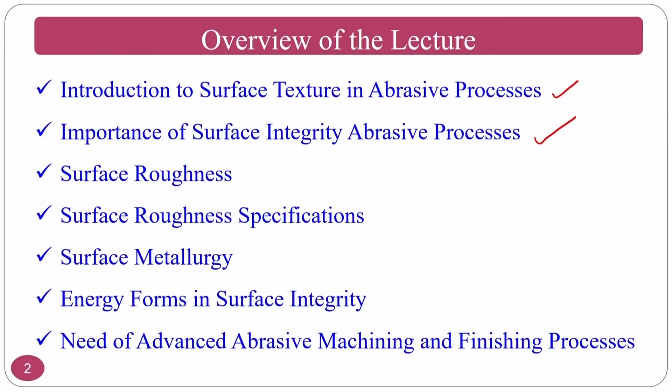Consider the grinding process, a conventional abrasive finishing or machining process. It not only generates surface roughness but also a lot of heat, because of which it can vary the surface roughness and surface metallurgy.

Because of high temperature, the surface may burn and degrade. Suppose the parent material grain structure is of a certain size; the grain size may alter because of the temperature generated during the process. That is why cutting fluids and other fluids are used in grinding. If you don't use them, there are lot of problems; if you do use them, there are other problems, as seen in previous classes.

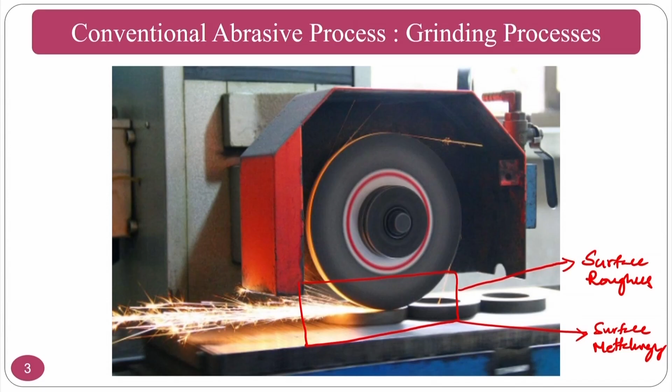Now I am going to teach you about surface roughness aspects as well as surface metallurgical aspects. Most often, as a mechanical engineer, you deal with surface roughness, and how its representation is done, which you will see in this class.

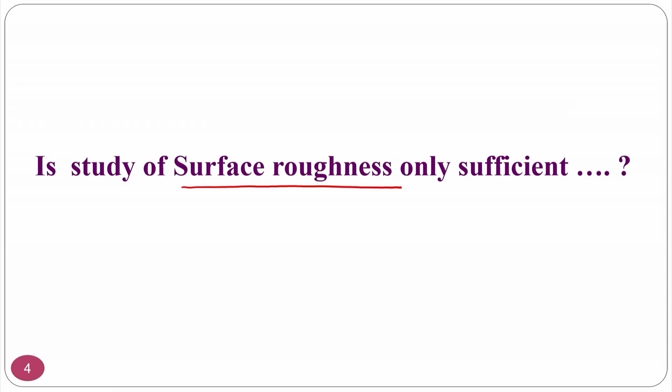Is surface roughness alone sufficient? If you recall the previous slide where the surface grinder is grinding and a lot of spark is generated, for that purpose you always look at surface integrity, which is nothing but surface roughness plus surface metallurgy. These are the two things one has to take care of.

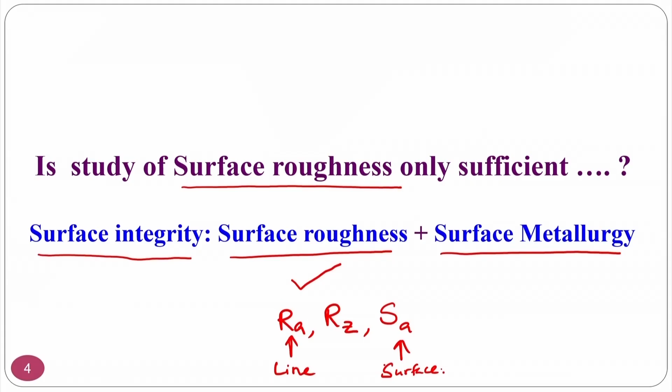As a mechanical engineer, we deal mostly with surface roughness parameters like RA, the average surface roughness value, RZ, the maximum peak to minimum value, and SA, the surface roughness value for a surface. RA tells about a line, whereas SA tells about a surface - SA deals with the average roughness over a particular surface, while RA deals with the value along a particular line. That is the difference between these.

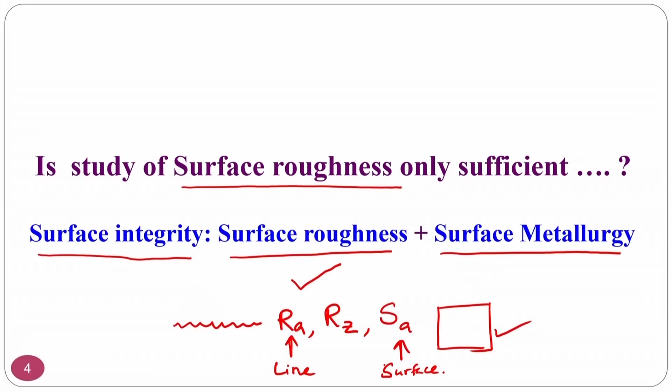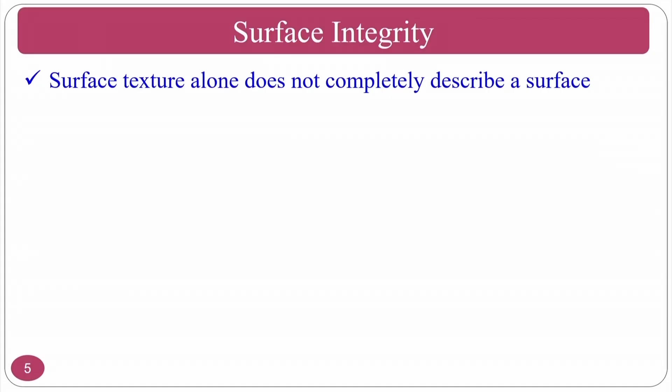Surface texture alone does not completely describe the surface, because the surface will have roughness, chips which are nothing but burrs, burnt surface, and many other things, since a mechanical system involves a lot of kinetic and mechanical energy. There may be metallurgical changes in the altered layer beneath the surface that can significantly affect mechanical properties. Assume the surface roughness is very smooth, but if the surface is burnt, once you put this component into practical application, metallurgical changes happen and lead to failure of the component. Even though surface roughness is very good, the component fails because of crack formation and other changes during practical application.

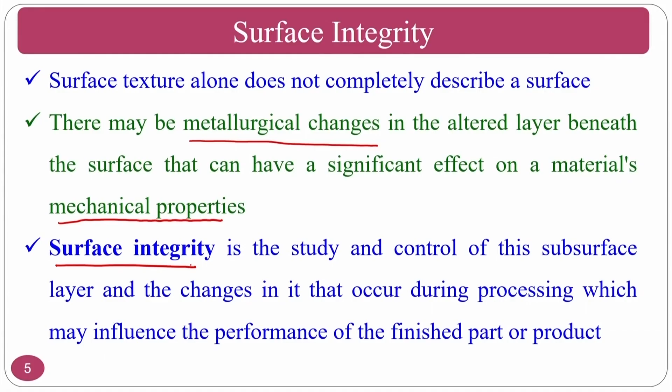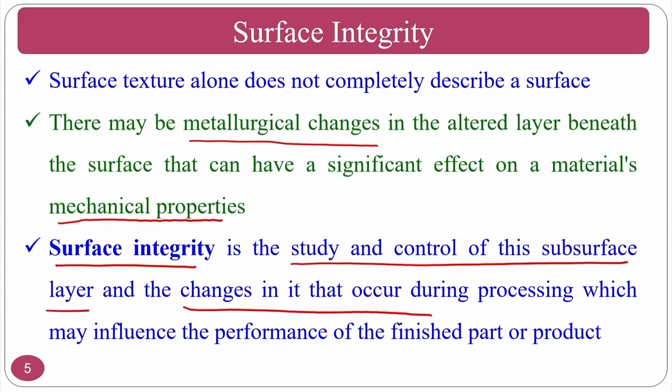This is why surface integrity came into picture. It is the study and control of this subsurface layer and the changes that occur during processing, which may influence the performance of the finished product. Surface roughness alone does not cover the complete picture; it also has metallurgical aspects, such as how the grain structure varies or whether there is any burning of the surface. So surface integrity has to be taken care of - not only surface roughness but also the metallurgical aspects.

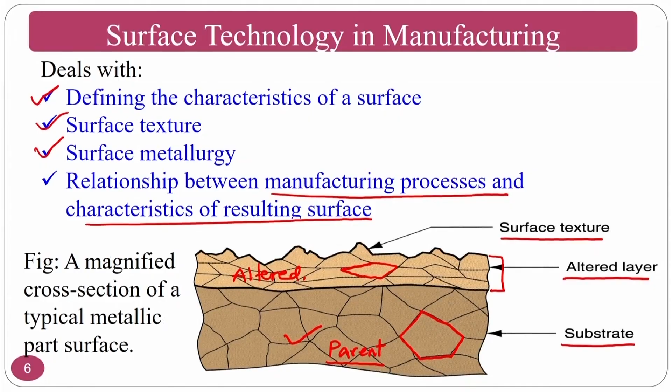Whenever I want to put a particular component, purely as a customer, I want parent material to be involved with respect to the interacting surfaces. But because of the manufacturing processes involved, you may alter the process, may alter the surface. That is why we have to take care about the surface roughness as well as surface metallurgy, and this altered surface will have a different morphology, different metallurgy, and the surface roughness also.

That is why the importance of surface integrity in abrasive processes, which we are going to study, is because of the altered layer and at the same time the surface roughness also.

Surface integrity in the grinding process - if you see burnt surface and unburnt surface, if you want to see the same surface, if you are giving good input conditions, you are going to end up with an unburnt surface, otherwise you are going to end up with a burnt surface.

If you see this one, the surface is burnt because of unfavorable conditions or unfavorable input conditions - this burnt surface is because of unfavorable input conditions that the operator has given during the grinding process.

Unfavorable input conditions lead to this particular burnt surface. If proper cutting fluid is given, low feed, low depth of cut and other proper conditions are given, then the surface is unburnt. That is why this surface is good from the practical point of view - this surface is good, but this surface is not good.

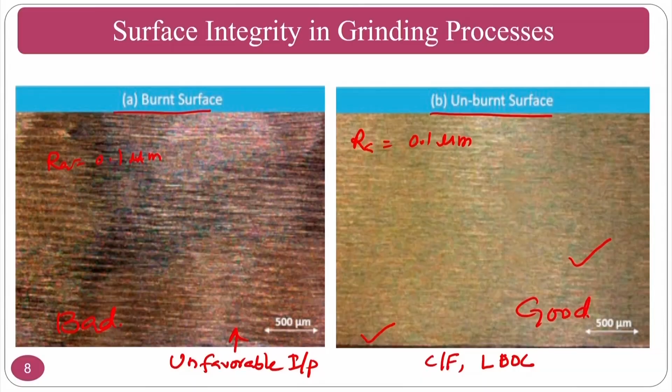Even though the surface roughness may be the same - assume that your RA value here is 0.1 micrometer, and here also RA is 0.1 micrometer - if you put both surface components practically, assume I have two components wherein one surface is burnt and the other unburnt, what will happen? Unburnt will give more life, but burnt will give less life because of its metallurgical changes. That is why you have to see the metallurgical aspect, not only the morphological aspect.

That's what I want to convey for those who work on surface roughness in grinding or advanced machining and other processes, because students will always report about the RA value - they will say we have achieved 0.1 micron or 0.01 micron and so on, but sometimes the paper lacks this. In a research paper it may alter the surface metallurgical aspects. So people should always mention the roughness value, as well as, if facilities are available, give the elemental analysis and surface morphological analysis using SEM and EDAX or EDS analysis. Using elemental analysis also you have to give this. Keep this in mind whenever you report a research paper.

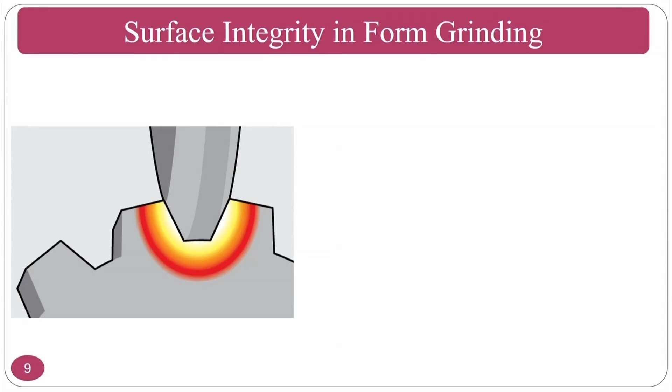The surface integrity in form grinding - assume we are doing gear cutting and other things - what happens here is, if you see the surface, normally this is the parent surface, and this is the metallurgically changed surface, the modified surface.

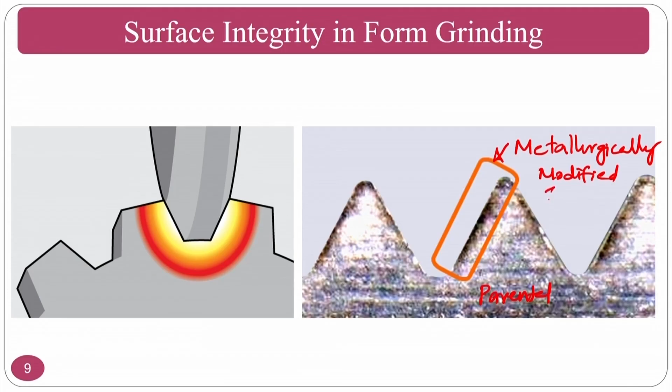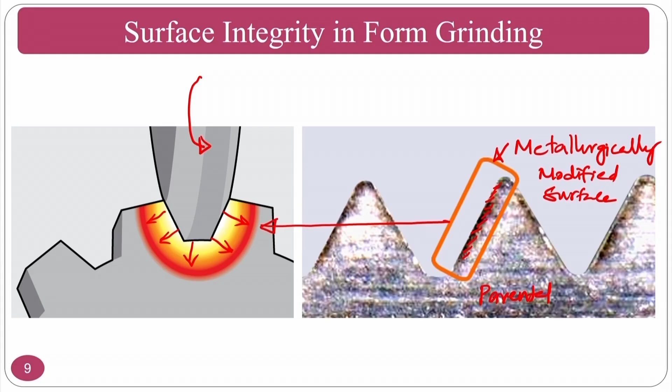Whenever you put this particular component in practical usage, what will happen? This particular surface will damage because the microstructure is different and the morphology is different. This surface may damage as early as possible because of crack formation and other issues. This layer is formed because of the temperature generated during this process - whenever you are giving this motion, temperature is generated. Because of the temperature generation, the microstructure changes, and if the microstructure changes, metallurgical changes occur to this component, and because of this it may fail during practical application.

You can also see the surface integrity in terms of other manufacturing processes. This is the parent material, the parent elemental structure, and you can see here clearly because of the heat and other effects, this is metallurgically changed.

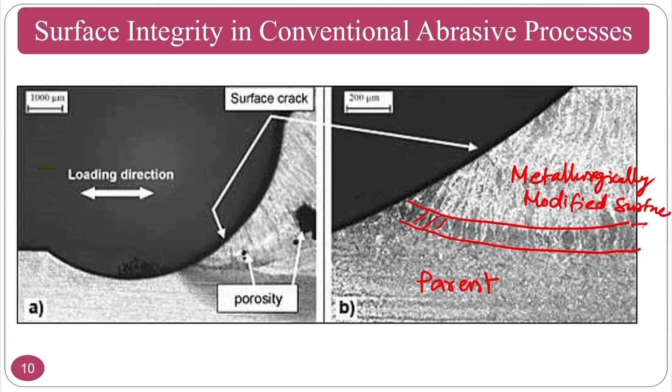Modified surface, metallurgically modified surface, is the surface wherein there is a gradual change between a metallurgically modified layer and the parent material. Sometimes people call it a conversion layer, because the microstructure in a metallurgically modified surface gradually changes to that of the parent material, and this gradual conversion is called a conversion layer in some textbooks.

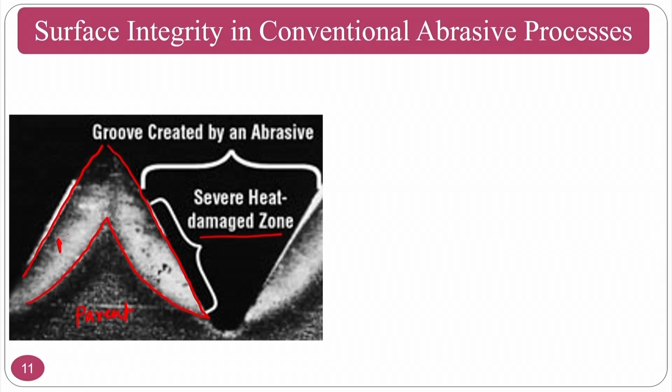You can see the groove created by an abrasive. Because of this, as seen in previous slides, structures like gear structures are formed. Severe heat damaged zone is there, and you can see the metallurgically changed layer here. This is the parent material, and this is a metallurgically modified layer. This is how the metallurgical layer forms because of heat generation.

This layer not only loses its mechanical strength because of the metallurgical change, but also can create cracks. You can see a lot of cracks generated on the surface, and whenever you put this component into practical application, what happens? This fractured surface will be brittle enough that brittle fracture takes place, and failure of the component occurs. That's why you should be very careful about surface integrity, not only roughness.

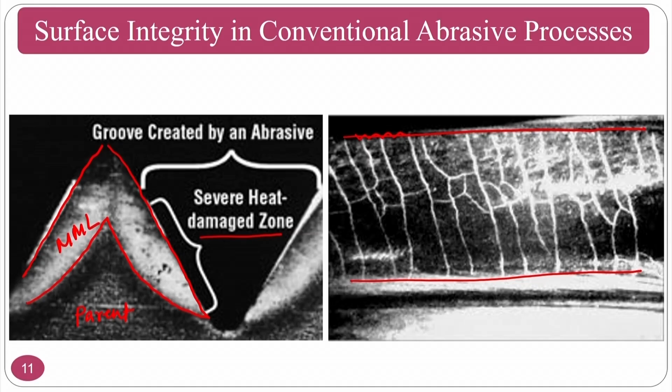If you see the roughness, this is a perfectly flat surface, you may not get a very bad surface. Here the surface roughness is very good, but you have to think about the surface metallurgical aspects. That's why mechanical engineers should also look into the metallurgical aspects and crack formation. Is there any microstructural change? Is there any elemental change? One has to check like that. Then only people get good publications in reputed journals.

As mechanical engineers, what we normally deal with is surface roughness aspects. So till now we have seen some of the importance of surface integrity and other things. Now we move on to our bread and butter, that is surface roughness and how it will be measured and represented, which we will see in this particular section.

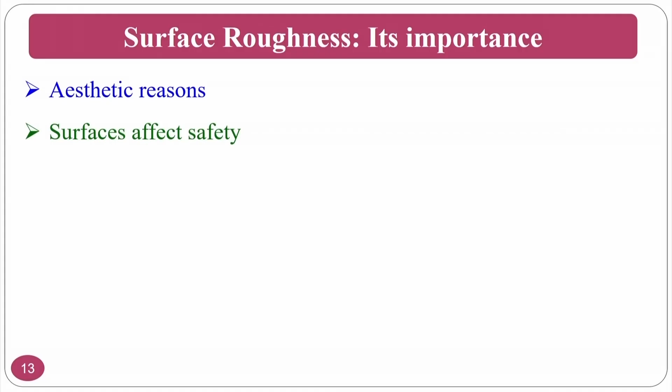Surface roughness importance: basically it gives aesthetic appeal, a very beautiful look, a shining or mirror surface. The surface also affects safety. Normally if the surface roughness is very smooth, it will be very easy to handle and it may not hurt the fingers or other parts where the operator is interacting with or handling that component.

Friction and wear depend on the surface characteristics. If the surface roughness is very high, the friction, wear and other things will be very high, so the friction losses will be very high. That means if you have a nano surface roughness, you will get low wear as well as low friction.

The surface affects mechanical and physical properties. Whenever you put a component into a particular application, the mechanical or physical performance will be better if the surface roughness is very good. Assembly of parts is also affected by the surface, meaning that if the surface finish is good and surface roughness values are low, the assembly of components will be very easy.

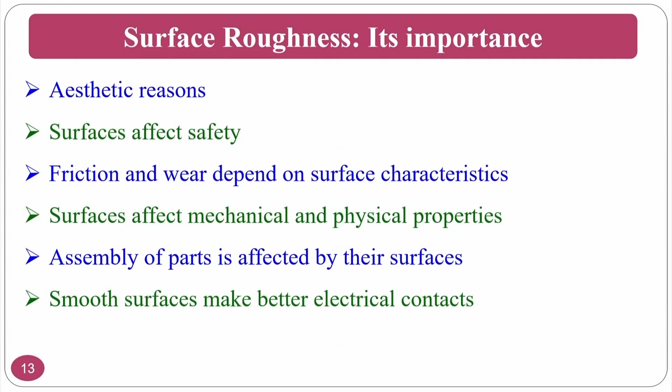Smooth surfaces make better electrical contacts. Whenever electrical contacts are improper, sparking will take place and there may be a loss in electrical connections. If you have a very good, low surface roughness, your electrical contacts will be better and proper connection will happen.

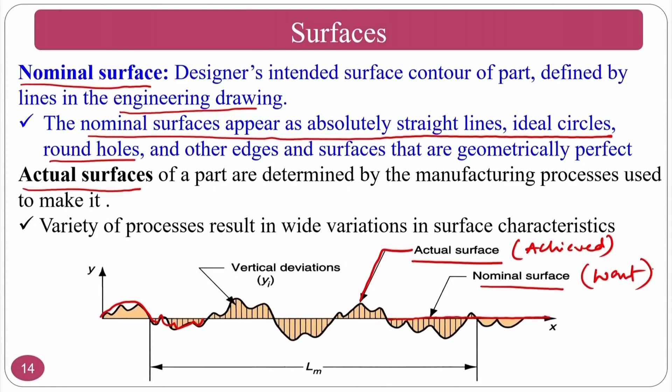So, the surface roughness in manufacturing processes. What I am going to deal with here is the surface integrity, which you have seen, the surface introduction and other things. The surface roughness measurement parameters, the surface roughness in various grinding processes, and surface roughness and surface morphology measurements, how you do them, and other things we will see in this particular surface roughness section.

Okay, the surface roughness section is one of the most important sections as far as abrasive processes are concerned, because abrasive processes are random processes: the abrasive size is random, the shape is random and the cutting edges are random. Sometimes, due to the sieving, your size may have slight variation. Assume the mesh size is 220, you may get plus or minus 2 or approximately 3, but the cutting edges and shapes are random. That is why the surface roughness you achieve is random.

If you use proper lubrication and cutting fluids, you will get a very good surface. But the surface roughness you want and what you achieve is slightly different. For that purpose, you have to go through this section, which is most important from the point of surface roughness in abrasive processes.

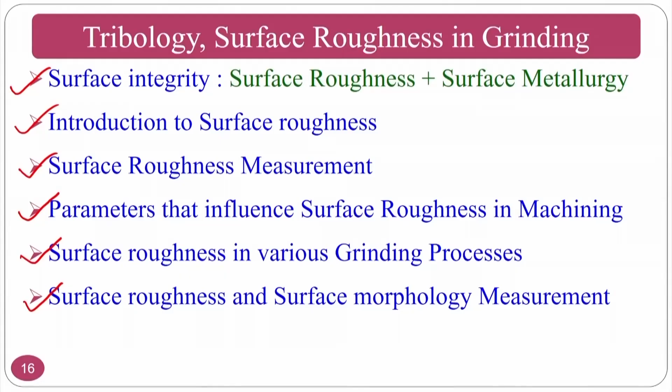Okay. If you see this particular surface, the surface will have 3 things. This is the surface. The surface will have a profile. This is called a profile, and PRA represents profile roughness. This is called waviness, and this is called roughness. Waviness profile and roughness profile. If you club the roughness profile and waviness profile, you are going to get the profile roughness.

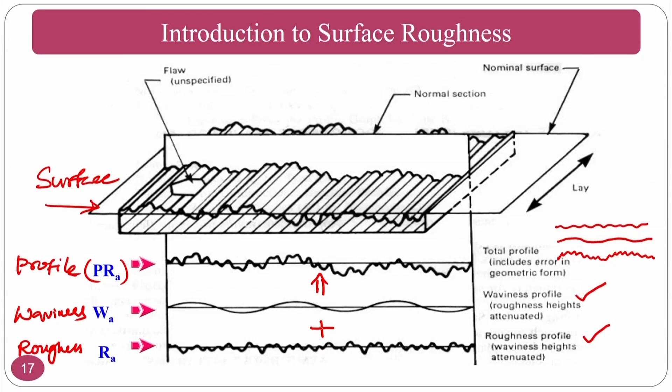Hope you got it. This is my surface roughness and this is my waviness. If you club these two, what I get is profile roughness. So, originally what you see is profile roughness, whereas the rough surface is what we want. That means we always deal with this particular surface. Waviness is also important, so that you can divide the roughness and waviness. Whenever you want to measure profile roughness and waviness, you have options in the surface profilometers. You just choose those sections and it will give all the values.

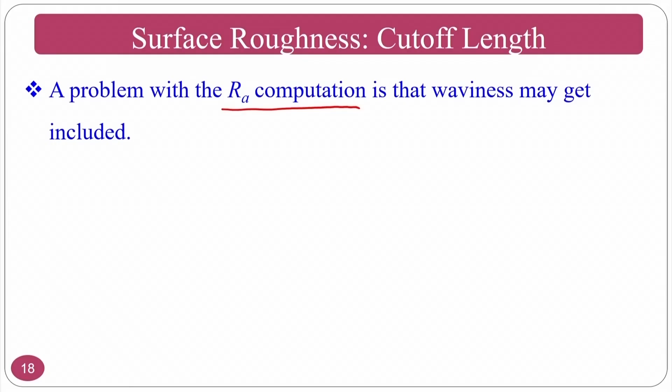Cutoff length is one of the most important things, because what we are measuring is roughness. If you do not choose the cutoff length properly, your surface roughness values may vary slightly. Why will it vary? It depends on the cutoff length, as we will see in this slide. A problem with Ra computation is that waviness may get included. As a manufacturing engineer, assume your requirement is to know only the surface roughness value, not the waviness. In that circumstance, if you do not choose the cutoff value properly, it may include the waviness also.

To deal with this problem, a parameter called cutoff length is used to filter and separate waviness from the roughness deviation. There is one particular thing you have to give, that is nothing but the cutoff length. You have to give a cutoff length whenever you measure. Cutoff length is nothing but the sampling distance along the surface, and the sampling distance is shorter than the waviness. That means you have to give the cutoff length, most of the time, less than the waviness of that surface.

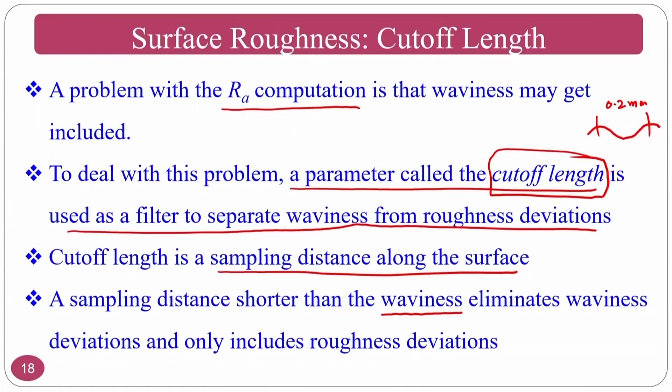So, if you give a cutoff length as small as possible, it will eliminate the waviness. If you intend to take waviness, you can give a big cutoff length; otherwise you have to give a very small cutoff length so that it eliminates the waviness. Assume my waviness distance is like 0.2 mm. If you want to remove this, just give the cutoff length less than 0.2 mm, so the waviness will not be included in the roughness. That is what some textbooks explain.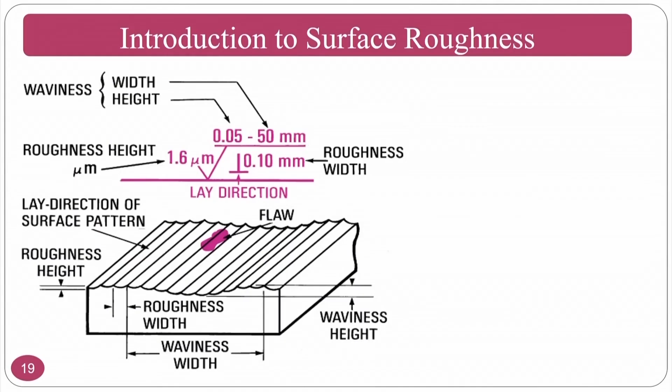If you see the surface, you have seen a similar picture in the previous slide. This is the surface where I am going to deal with the lay. Lay is nothing but the direction of the surface pattern. Here the surface is generated by the grinding process. Assume the grinding wheel is rotated like this, the surface pattern is generated. The lay is the predominant direction of the surface roughness, how it is formed, and you have to measure the surface roughness in the direction perpendicular to the formed surface pattern.

That means that this is the direction of your surface roughness measurement, so that you will get a good value of surface roughness, or the original value of surface roughness. Sometimes some people will measure the roughness in this direction also. Some people claim that this is also good, but practically what I feel is that you have to measure like this, perpendicular to the lay direction, then you will get the original surface.

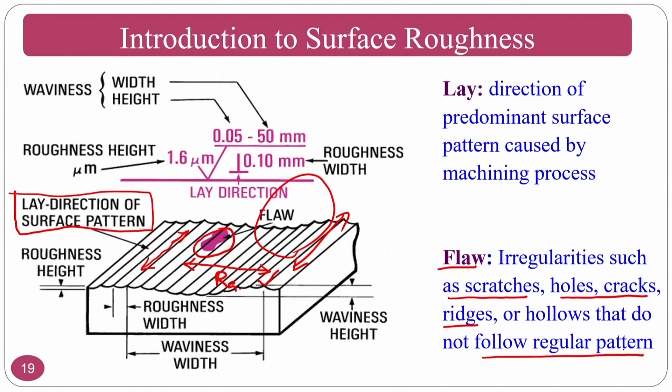The flaw is nothing but this one, whatever is there. It's the irregularities such as scratches, holes, cracks, ridges and hollows from the regular pattern. That means these are some of the problems because of the grinding process, problems because of material defects during the material processing itself. Assume that I am purchasing a block from some company. If there is a material defect, these types of flaws will come.

Assume that there is an inclusion, so it will stay there. So that is a flaw. If there is a hole, which is a blowhole during the casting process, that is a flaw. If you are grinding, then a deep hole will come, and other things. So what are the other things that we have to see? The four elements. One we have seen already.

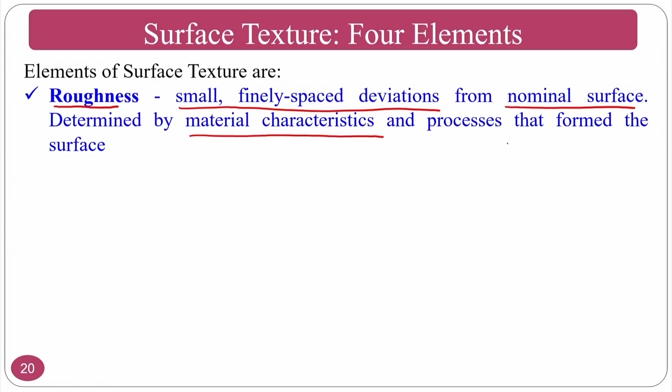So roughness is nothing but the small, finely spaced deviation from the nominal surface. This is a small, finely spaced deviation from the nominal surface determined by the material characteristics and the process that formed the surface. Waviness, as we have seen, is a deviation with larger spacing. This is the surface roughness and this is the waviness. So you can clearly see that this is a small and finely spaced deviation, but the much larger spacing is nothing but waviness.

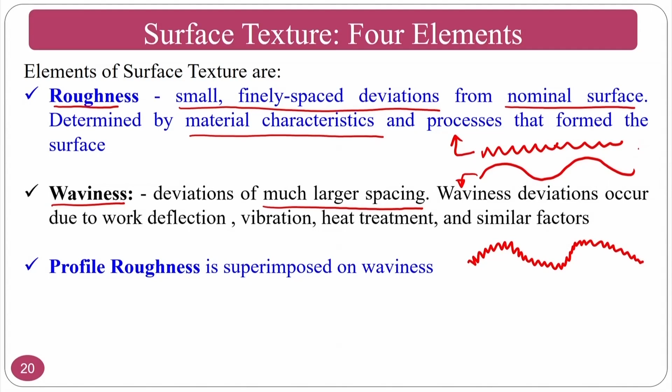And the profile roughness: if you superimpose surface roughness as well as the waviness, you are going to get a profile roughness. I am just superimposing the roughness as well as the waviness. These two, 1 and 2, if I am clubbing them, then I am getting 3, that is nothing but profile roughness. The flaws we have seen are the ridges or holes that are formed. In the previous slide also we have seen them.

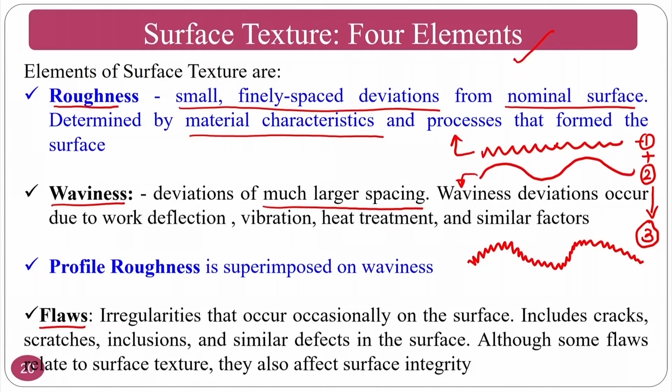So why I want to repeat it here is that these are the 4 elements that determine the surface texture: roughness, waviness, profile roughness, as well as the flaws. These 4 elements determine the surface texture, in terms of surface roughness only, not in terms of surface metallurgy. If you consider surface metallurgy, then things will become more and more complicated, so that you can understand more deeply.

Because if you are concentrating only on surface roughness, sometimes you may miss metallurgical aspects. And if you are concentrating only on the metallurgical aspect, you may miss the mechanical aspect like surface roughness. So if you are a mechanical engineer, try to collaborate with metallurgical people and come up with a good paper in terms of advances in this particular area. So, these are the surfaces.

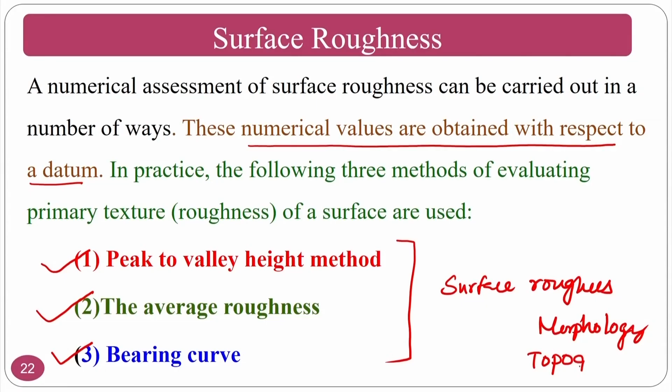Okay, this will explain the surface roughness, indirectly surface morphology, or some people call it topography. If you see the introduction to the surface, normally there are two ways to measure the surface roughness value. Normally people like to go for the Ra value, and some people will go for the Rq value also. Ra is nothing but the average surface roughness value, the central line average value. Ra is known as CLA, central line average value.

How can you measure it? Assume that I have this particular surface, for which I don't know any value. I am assuming a contact type surface profilometer, and if the contact surface profilometer moves on this particular surface, it will measure the surface topography and give a certain value. How it gives that value, I am going to explain here.

This is the surface, and the surface profilometer moved over all the nooks and corners. Assume that it moved to each nook and corner. Once it moves from x to y, assume that this is the y, the surface profilometer knows where the peak is and where the valley is.

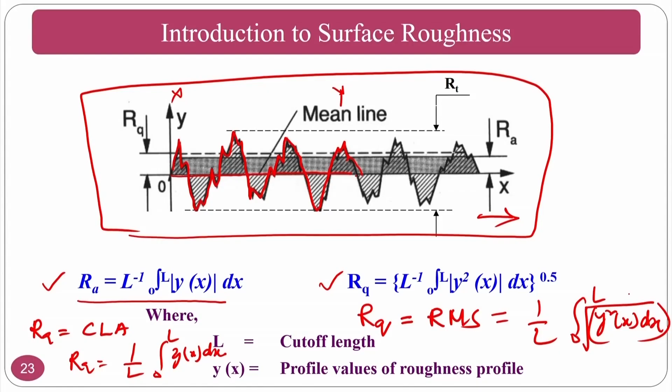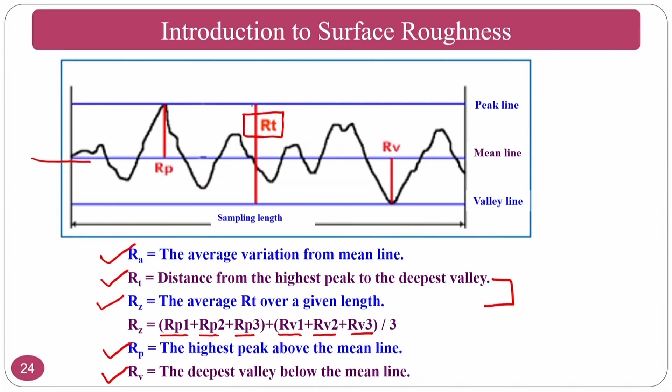So, people sometimes may confuse between RT and RZ. RT is nothing but the maximum peak to minimum valley, and RZ is nothing but, on an average line, you take 3 big peaks and 3 deepest valleys and average them. So, approximately here also the values are slightly variant, there is slight variation in the particular values.

So, surface roughness measurement: you can do it by inspection, by comparison, or by direct instrumentation measurements. Inspection by the comparison method: in these methods the surface texture is assessed by observation of the surface. Normally, this is a qualitative measurement. You can observe using laser, you can observe using other mechanisms, assessing the values or the quality of the product. These methods are qualitative analysis.

Normally, whenever you see, okay, this surface is very good, oh, this surface is burnt, this surface is not good, like that. Ram is a good boy is a qualitative statement. Ram is a 99% good boy, that is a quantitative statement. So, you cannot make a quantitative statement by the inspection method. You can say the particular surface is very good. You cannot say by seeing a surface that it is 1 micron, because your eyes do not have that ability. You can only make a qualitative statement. That is this inspection by comparison method.

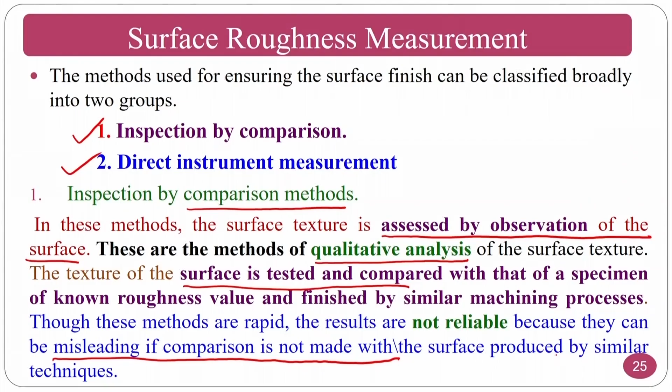Though these methods are rapid, the results are not reliable because they can be misleading if the comparison is not made with surfaces produced by similar techniques. Assume that I have one grinding surface and another lapping surface. Your master is a lapping surface, and if you are comparing it with the grinding surface, your comparison by inspection may be misleading. So one should be very careful about the inspection method.

If you have a masterpiece of lapping, you have to check with the lapping surface. If you have a masterpiece of grinding, one has to compare grinding surfaces. Assume that I am going to the shop floor and I have grinding samples which I have to compare by the inspection method. So I need a master made by that particular machine using the grinding process. If I have a grinding master and 10 samples done by the grinding process, I will look at this one and this one, then I can compare.

What I mean to say is, if a particular person is going to compare grinding surfaces, he should have in view the grinding surface masterpiece, so that he can compare. If it is a lapped surface master and you are going to inspect grinding, then it cannot be done. This may lead to misleading inspection.

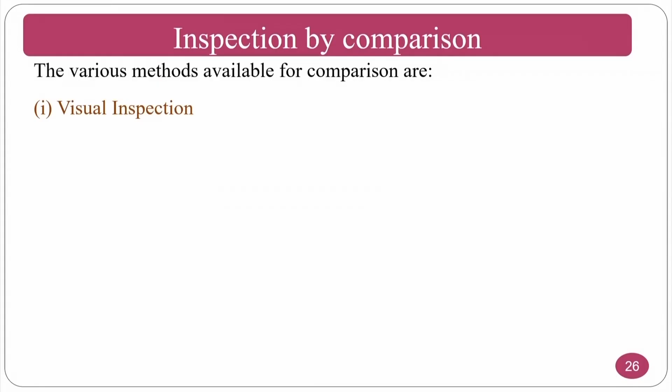First we will see inspection by comparison, and the various methods available for comparison, like visual inspection. That means experienced people see visually and compare with the master. Assume that I have a milling master, a surface produced by milling, and surfaces that are to be supplied to the customer. You can compare them by the visual inspection method.

And touch inspection: you can check whether the surface roughness is proper or not just by touching the surface. And scratch inspection: you can do scratch testing, and later you can inspect it visually or by touch.

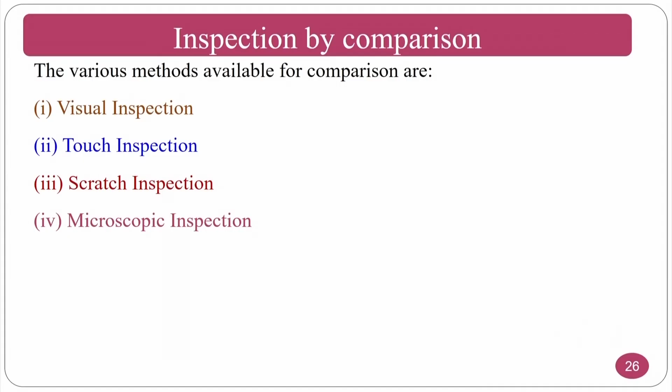The microscopic inspection: you can use this optical microscope and you can see the quality of the surface, the surface morphology, and you can tell whether the product is right or wrong, acceptable or not acceptable. And the surface photographs also look at the surface morphology, and you can see how the top layer of the surface looks.

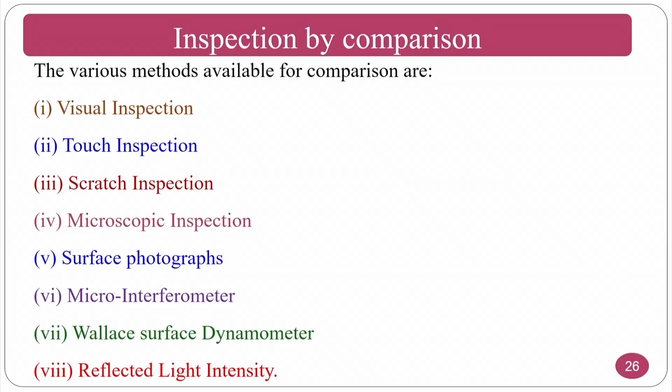The micro interferometer, the Wallace surface dynamometer, where you can see using the forces also. Suppose I want to see the surface of that particular component, you can also see by these things. And the reflected light intensity; these are the methods. If you see here, these are two things that you can visually see, camera based, line scan camera based. Parts are transferred like this, and this can be inspected by using the line scan camera.

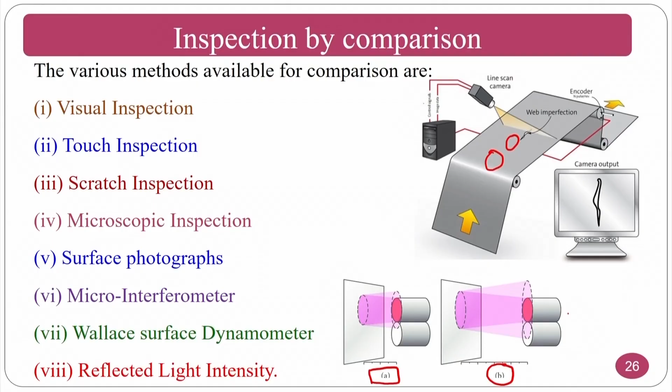At the same time, you can do this method by having a master and comparing with respect to it. These will all tell you whether the product is acceptable or not acceptable. Assume that this is the master and this is your component that is produced. If my requirement is as per the master, you can compare qualitatively, but you cannot compare quantitatively. For the quantitative comparison, you have to go for direct instrument measurement.

There are various methods to do the quantitative analysis, that means whether the surface is 1 micron, 2 micron or 10 micron; you have to specify the surface roughness of that particular component. These methods enable us to determine the numerical value of the surface finish, that is, the surface roughness of any surface, by using instruments of stylus probe type or electrical principles.

One of the methods that you can use is the probing method. You have this type of probe, and it will reciprocate, as you have seen in the previous slides; I will show you in the upcoming slides also for better understanding. The instrument's output is amplified, and the amplified output operates a recording or indicating instrument. The probe reciprocates on the surface and gives certain values, and these values are amplified and give the original surface roughness value.

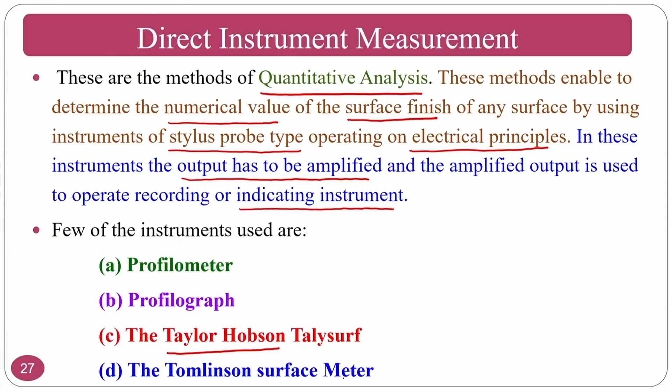A few instruments used to measure surface roughness by the direct instrument method are the surface profilometer and the profilographs. Many equipments are there. One company that produces them is Taylor Hobson, and you can see how you can measure the surface roughness. Then the Tomlinson surface meter also; these are some of the methods available to measure the surface roughness value of the surface on the component.

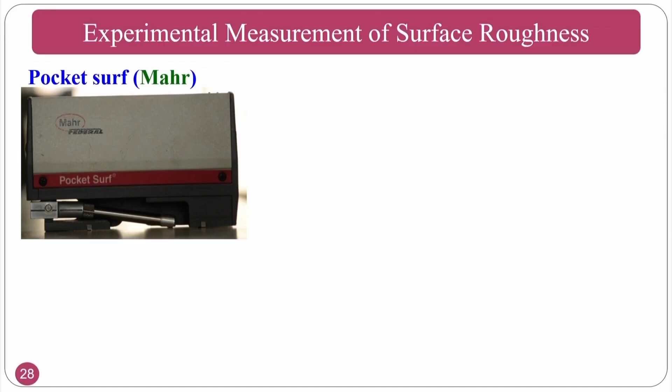The experimental method, which you already saw in the previous slides, I am showing again for better understanding. You can see the Pocket Surf, and this is the Surface Analyzer 5000, made by Federal. These all measure by contact type. These are contact type surface profilometers. You have a surface, on top of the surface your probe will reciprocate and give you the surface roughness value. Similarly here also you have the probe; you just place the workpiece here and it will reciprocate and give you the value.

How does it do it? You have to specify the cutoff length. As I said in the previous slides, the cutoff length should be less than the waviness of a particular sector; then the waviness will not be included in the surface roughness value. Normally, your cutoff length multiplied by 5 gives you your complete scanning length. SL stands for scanning length, CL stands for cutoff length, and normally 5 is considered.

Why? Because sector 1, sector 2, sector 3, sector 4, sector 5. My probe, that is the contact surface profilometer... let me explain from this point. I have a surface here and this is divided into 5 sectors.

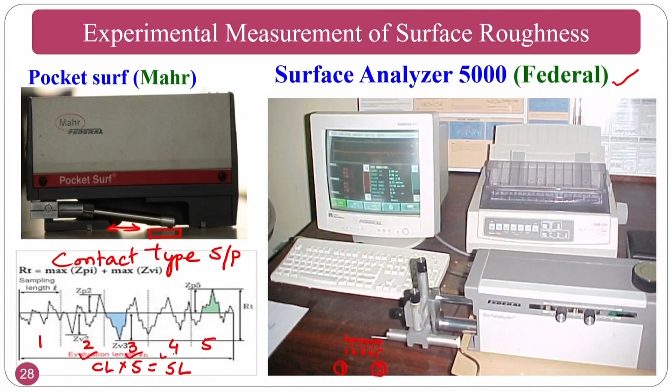In that circumstance, sector 1 and sector 5 will be counted for inertial effects, and the surface roughness value that it is going to give you is from sector 2, sector 3 and sector 4, which is at the middle. The basic drawback of that surface profilometer is the initial sector and final sector, where acceleration and deceleration problems will be there.

For that purpose, at the same time it cannot give you the surface roughness of a particular surface. Assume that I want to measure this particular surface roughness, I mean I want to measure the complete area of surface roughness. That cannot be done, except by doing multiple segments, and you can only give an average. It will take a lot of time. For that purpose, the scientist came up with a non-contact type surface profilometer.

These non-contact type surface profilometers give you area surface roughness, at the same time line surface roughness and other things, and there is no problem of acceleration and deceleration, which are the two drawbacks in the contact type. At the same time, contact type cannot give you area surface roughness, only line surface roughness, it can go along a line and give that. To measure an area and other things, you have to go for a non-contact type surface profilometer.

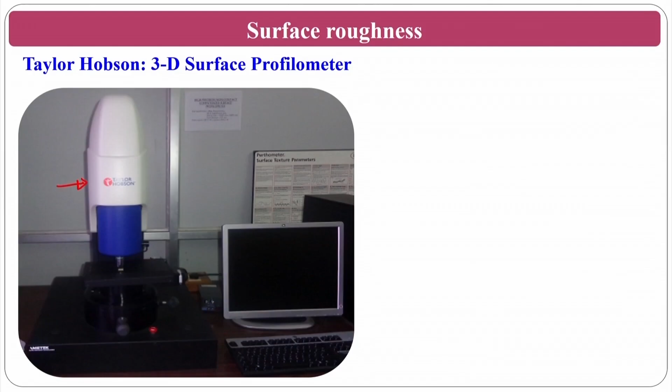This is the Taylor Hobson, manufactured by Taylor Hobson, which is one of the big companies in the area of surface profilometers. Normally it will give you, if you have an eyepiece, you just place your component here. This is the eyepiece, and you can see your surface roughness on the screen, and you can measure a line average surface roughness, or the area surface roughness in a sector, or measure lines. You can measure whatever you want, as per your requirement.

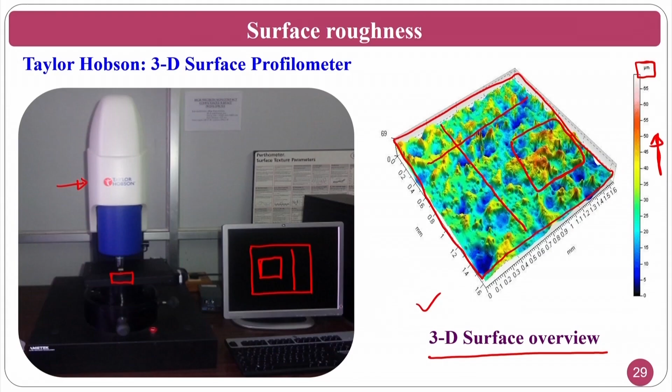So for the experimental method, as I said, this is the 3D surface where you can measure the surface roughness and average of an area. Whenever you want to take, you can take A as a 3D profile, and if you can generate a 2D profile of that one, you just go and take the top view of that, so you can get a 2D profile. At the same time, if you want to measure the surface roughness along a line, you just draw a line using that software, and you will get a line surface roughness.

That is the difference between the RA value and SA. So RA is nothing but the line average surface roughness, that is nothing but CLA, central line average value of a line basically. SA is equal to the central line average value of an area. That is the difference, this refers to this one and this refers to that one. So this is how you can get the 2D profile as well as the 3D profile using a non-contact surface profilometer.